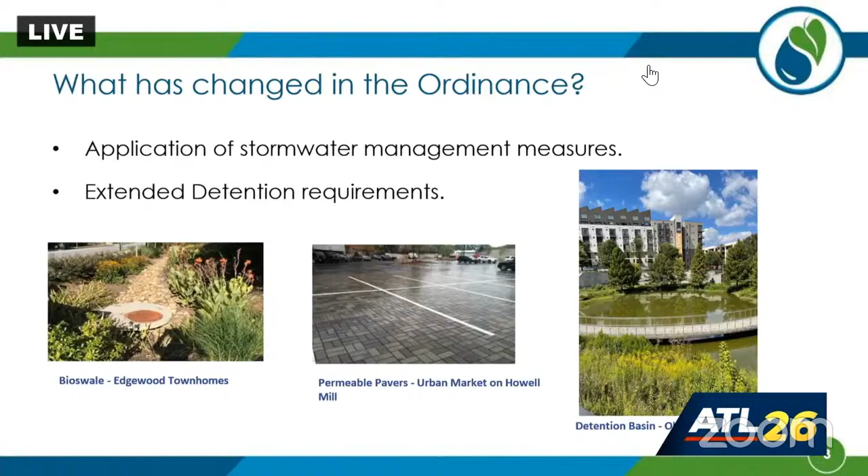This is to prioritize measures, changes to allow flexibility in stormwater measure applications. Previously, our codes required, prior to the development, a series of best management practices to be proposed in the construction drawings in a certain order if they are feasible. And so this ordinance still meets all the requirements of the Georgia Stormwater Management Manual, as these BMPs were put in to make sure that we meet all of our water quality requirements. However, based on site-specific cases, maybe one best management practice would be preferred over the other, but the result is that all the requirements will be met.

And these are through our dealings with a lot of our developers and their concerns, and whether this is something possible. So this basically still meets all the requirements. However, it makes it more flexible.

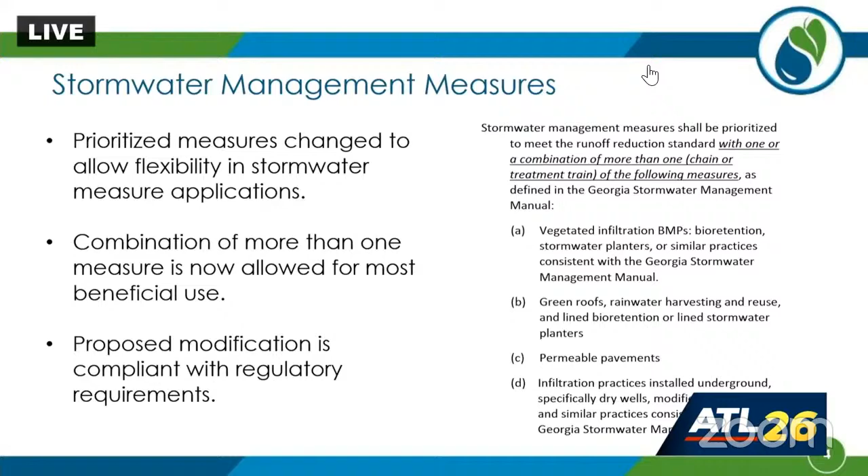Then the idea of what is stormwater extended detention. Extended detention is to capture and store and controlled release of stormwater generated in the city during the rain. The detention can be in open basins, in ponds, or in underground vaults and tanks.

Basically, the purpose of stormwater control as far as water quality and/or flood control is to mimic situations so that after the development of a given site, the observer at the point of discharge will still not see any adverse effect of flooding and/or increase in the level of pollutants. So by definition, stormwater management has one prong of water quality, and the other one flood control or water quantity.

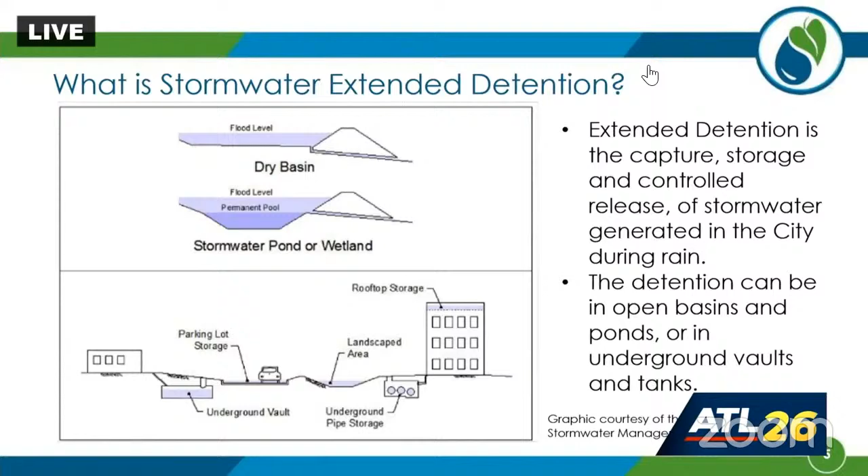Well, to mention why stormwater detention is important: as we just mentioned, new development without any controls usually has negative effects on both water quality and quantity. The additional impervious surfaces cause increase in peak flows. These are the examples of the adverse effects. And total runoff volume, which can increase urban flooding risks.

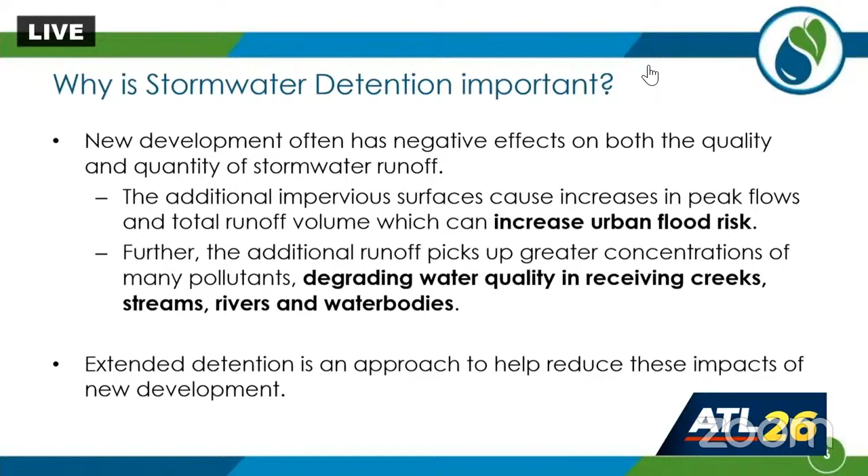Further, the additional runoff picks up greater concentration of many pollutants. As a result, the waters of the state or our waters running through the city are degraded. Extended detention is an approach to help reduce these impacts for new development as far as water quality and/or flood control water quantity goes.

Currently, our design criteria calls for a given development, within their BMPs, to adhere to requirements for water quality, as you see in blue in the bottom, which is 1.2 inches of runoff, basically the first flush when the rain comes. It causes all the pollutants, oils and greases and debris to wash into the system. So currently we detain and control the 1.2 inches of first rainfall for water quality for a time of 24 hours.

And then above that, we see 3.34 inches. These are for the 1 year storm. The depth of that is 3.34 inches, and that 1 year storm is also labeled as channel protection, meaning when the development is discharging into an open channel, holding that 1 year storm, which is 3.34 inches of rain for 24 hours, allows the channel bank not to get degraded. So this is what we have right now currently.

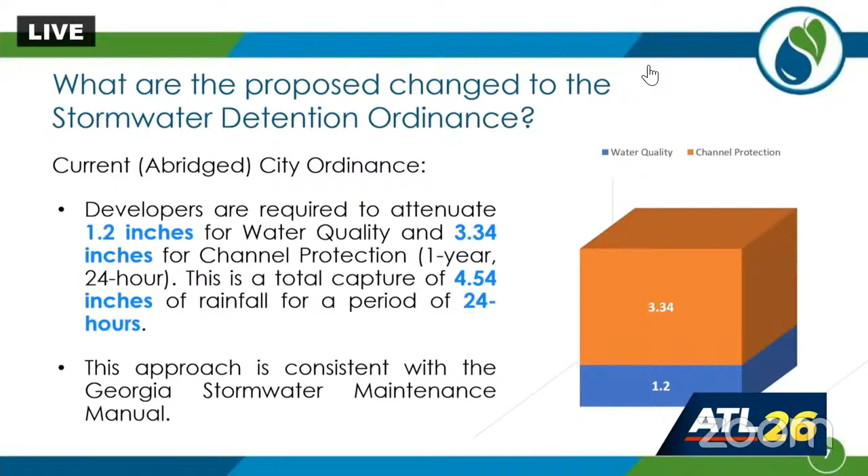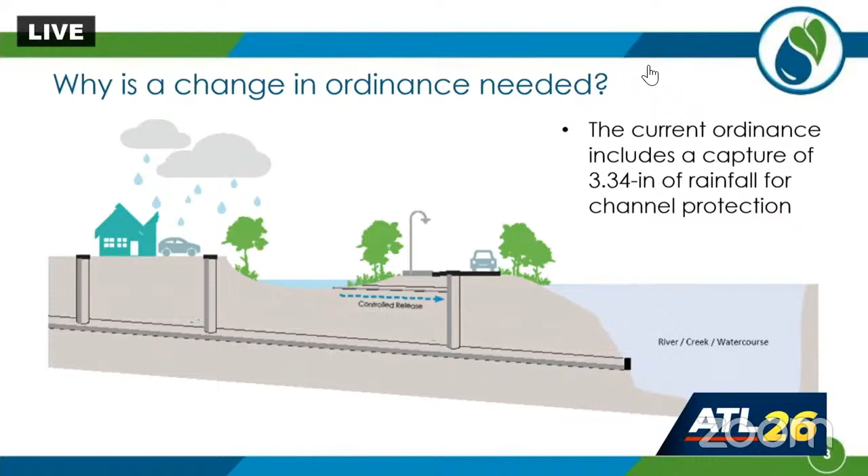And then why is a change in ordinance needed? As we mentioned, the current ordinance includes a capture of 3.34 inches as a 1 year storm of rainfall in the channel. What we are proposing, in the bottom, is still 1.2 inches of rain for water quality, no change with that. And we had 3.34 inches of rain for the 1 year storm. We propose to cut that in half to 1.7 inches, and add them together: 1.7 plus 1.2 is 2.9. And instead of holding it for 24 hours, we hold it for 48 hours.

The reason is that our existing system, specifically in highly urbanized areas, is a system of infrastructure that is mostly combined or separate. Previously these inches of rain hitting the system were detained for 24 hours; now we're proposing 48 hours. As a result, it allows the existing system more time to convey the storm flow without getting choked up and causing flooding. And we see that happen in highly urbanized areas all the time.

The system is the same, but this attenuates the time of release from 24 hours to 48 hours, allowing the system to digest this stormwater and pass it without creating flooding. So these are the changes. The 24 hours go to 48 hours, and 3.34 inches is cut in half.

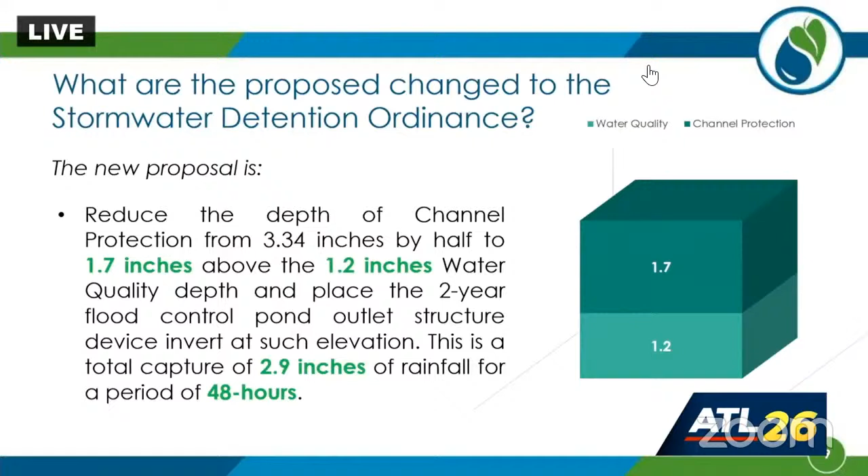Well, as I mentioned, this ordinance does not apply in suburban areas, because there, when we discharge the stormwater into the open channel, we need that channel protection fully at 3.34 inches, because the purpose of the 1 year storm or channel protection volume is to protect the channels, to reduce the scouring effect of the water and protect the channel sides.

However, we are proposing this ordinance to be only applicable to highly urbanized areas where we are discharging into a closed conduit system, which most probably could be the combined sewer. As a result, there is no channel to protect, and that's why we are proposing half of 3.34 inches, which is 1.7.

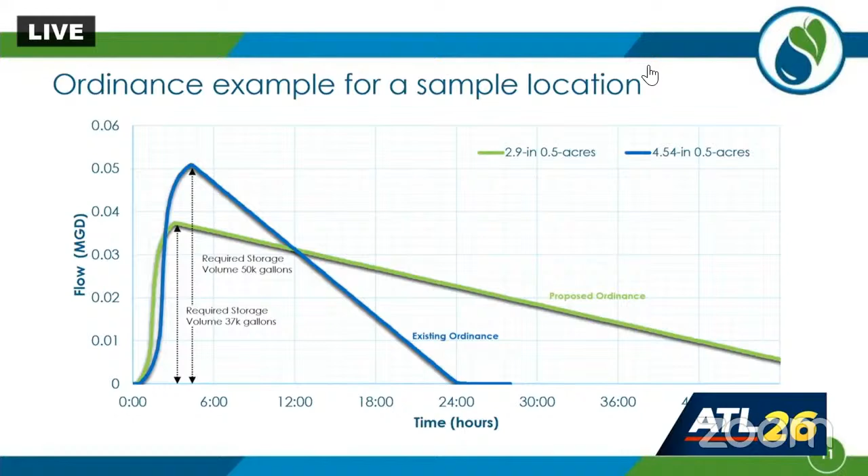development. So they don't need to create something which is oversized, not necessarily applicable to highly urbanized area, but as a result, everybody wins. And so what it does is actually produces more volume to control and treat and reduces the peak. So that is the validation that our assumption for highly urbanized area is working, and this ordinance is warranted.

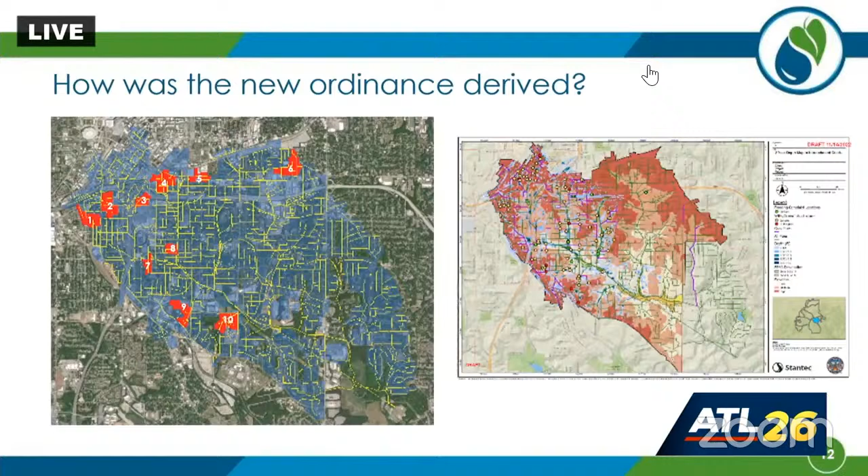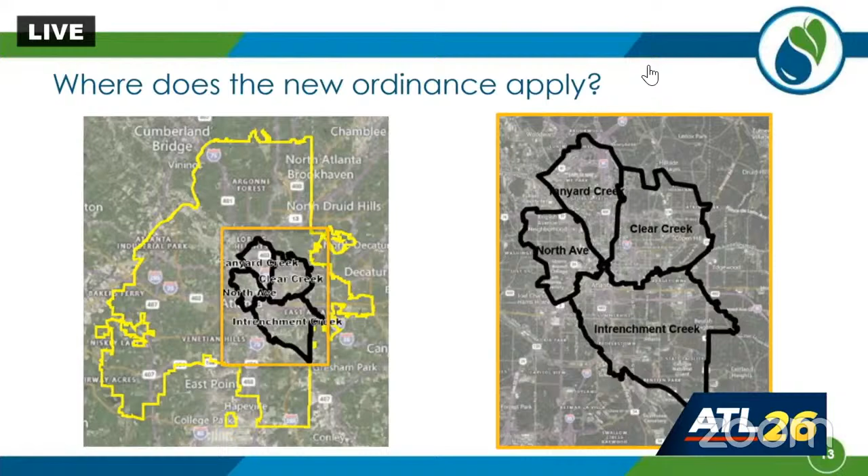As I mentioned, those areas where the sample sites were taken, we modeled and analyzed through our hydraulic modeling, and the results were favorable and validated. Again, as we mentioned, this ordinance is only applicable to highly urbanized areas, where mostly we are discharging into a closed conduit system, and we don't have an open channel to protect. So we still would fall within the rules and regulations of our NPDES program, which is the National Pollutant Discharge Elimination System, as enforced by the Georgia EPD. And it works.

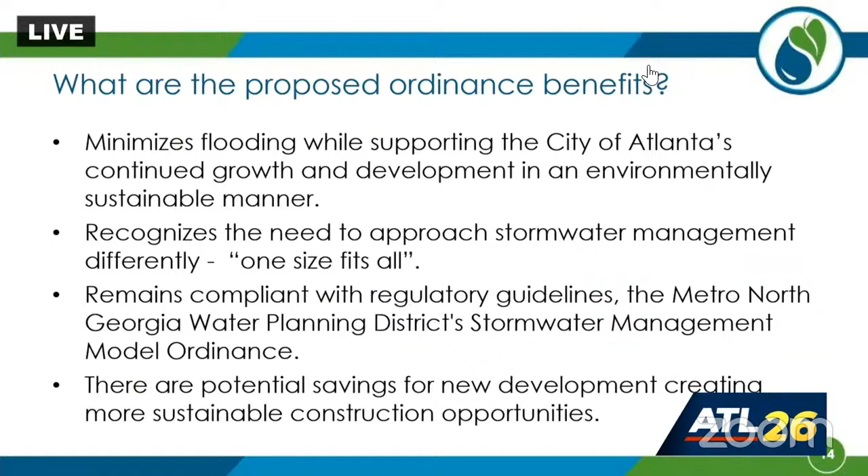Well, the benefits, as we mentioned, is it reduces the peak, increases the volume, increases the attenuation of the storm flow, the treatment, and it holds back till the system has time to safely convey, and it still meets all the requirements of the Georgia Stormwater Management Manual. And what we proposed was not a one-size-fits-all. For highly urbanized area, this is what this proposal is, but for suburban areas, we still stay with what we had in the past. All right. So with that, if there are any questions.

All right, thank you. We've been joined by Mr. Dozier. Ms. Norwood has joined us virtually. And does that conclude your presentation? Yes, it does. All right, we'll recognize Mr. Dozier.

Thank you, Mr. Vice Chair, and thank you to all of y'all for coming out today to talk about this very important and timely issue. I know y'all have been really hitting the ground running over the last 6 months or so since we had the big rainfall event back in September, and I love that we're looking at all of our policy tool opportunities to address this long term. I know that the post-development stormwater detention ordinance, we were originally looking at making changes to it 3-4 years ago. I believe that legislation was held in committee. What substantially is different in this legislation versus what was originally proposed a few years ago, if anything?

Well, so no change to what was enacted in 2020. This is an additive. We proceeded with all of the recommended provisions back in 2020. The extended detention topic was contemplated, but we paused on it. We wanted to do more engineering analysis. As you know, we convened a technical advisory committee consisting of a diverse group of technical professionals, developers, engineers, to really understand how this policy would affect new development, specifically affordable housing. So this was just a piece of it that we paused on to do more analysis and come forth with a policy change or addition that we felt would be feasible for new development, specifically within the combined system.

No, it doesn't. Basically, in this model the winning key is the attenuation and reducing the peak. Still, a 1 year storm is a 1 year storm, 3.34 inches. That doesn't change. The volume is still the same. What it does is, with this recommendation, our peak discharge is reduced, and the length of discharge is increased in time. So as a result, the developer needs less cubic feet or cubic yards of volume, which makes it more economical for them. And then our existing system is allowed to digest this in 48 hours instead of 24 hours.

Exactly. So what this shows is, under the blue peak, we may have system failure. On the green peak, we may not have system failure. So you're not gonna have system failure because of the long term, but more on the short term. Right. Higher peak over a shorter term, which causes system failure, is blue.

Less peak, longer time of discharge is green, which is our proposal for 1 year storm only, which allows the system not to choke and not to fail.

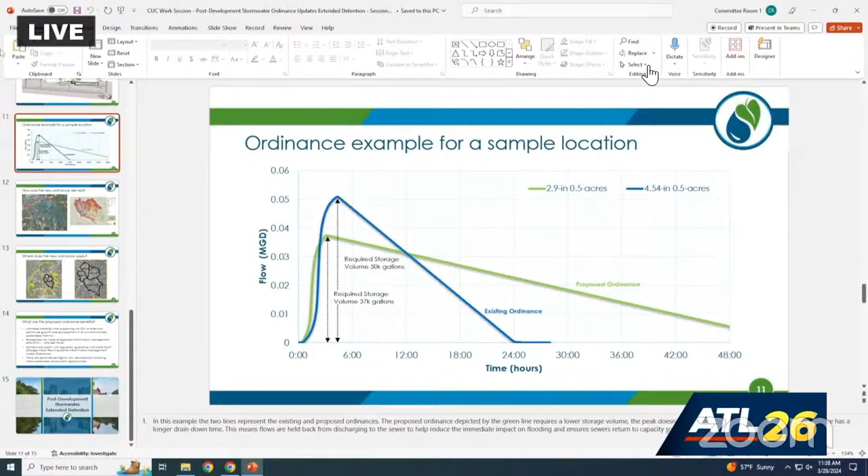Okay. So let me follow up on Councilmember Shook's question. So is the current ordinance for the non-urban, as you've called them, the suburban areas, is it working? When you don't have a closed system and you're allowing the flows to the streams and otherwise to be the outlet, is that, in your opinion, working well today? Absolutely it does. We haven't had any problems. We were involved in development of the Georgia Stormwater Management Manual back in 2003, and since then we haven't heard any malfunction of the system or our methodology, and it really does work.

And there's no notion that in a place like Buckhead or a place like Councilmember Dozier mentioned at Lee + White or some of these other areas where we do see an enormous amount of development that is not in the closed system, we don't believe that that is going to peak in a way that's going to overwhelm the non-closed system approach that we have?

Not at all, because we have other measures such as our 10% rule, which I'll explain in a second, but this is for a 1 year storm, which is for channel protection, for the sides of the channel not to get scoured. And that is on a given channel by observation. If you see it half full running, that's your 1 year storm. So anything above that, no changes.

And if it discharges into the open channel, no changes. The only thing is if it discharges into the closed conduit, which most probably for us is the combined sewer, there is no channel. So we took advantage of that to benefit the developers as well as allowing our system to breathe.